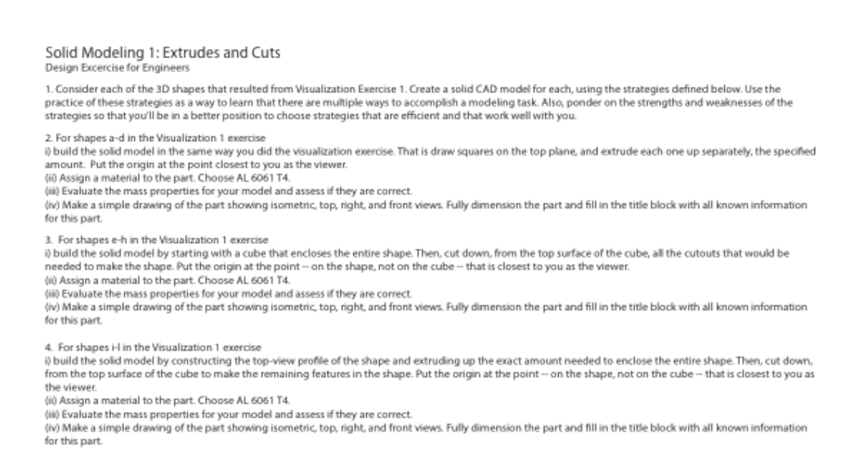If you follow along in this video, you'll make this part and this drawing. I do recommend, however, that you pay attention to the description of the exercise so that you make sure you're working on the right things.

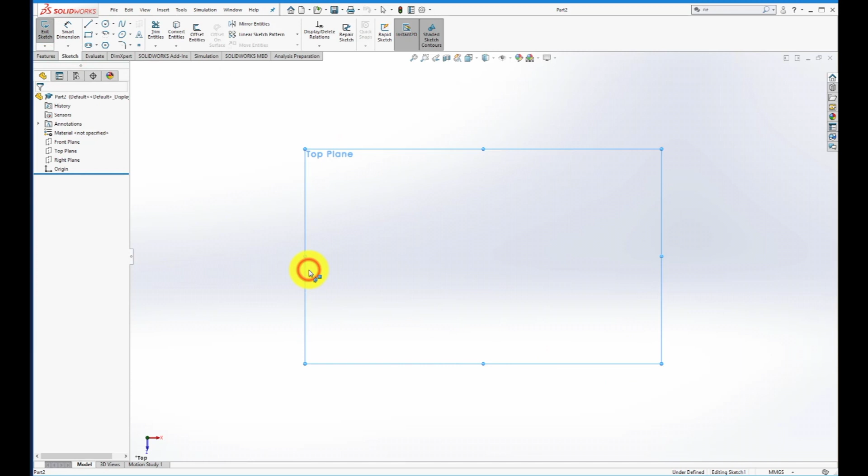Now, as we start our part, we want to make sure that we have named this well, following good naming scheme methodology. We also want to make sure we're working in units of millimeters. We want to start our sketch, choosing our top plane, making sure our origin is showing up where it's supposed to. So I've turned on the visibility planes so I know where I'm working. I got my basic rectangle tool.

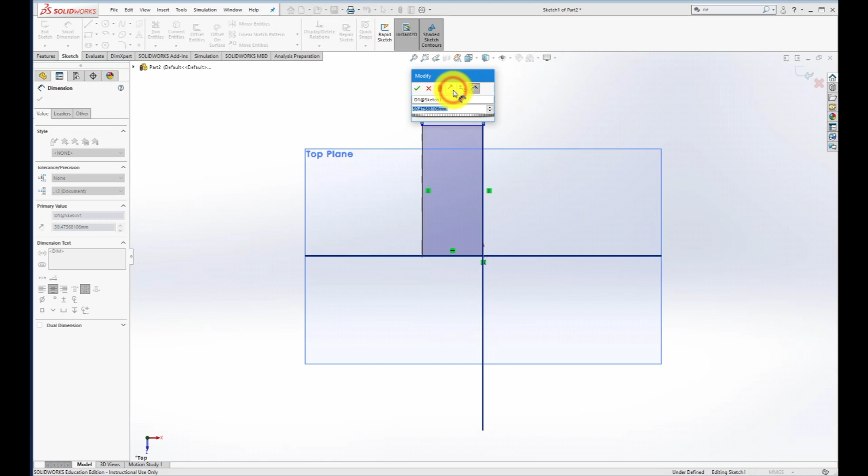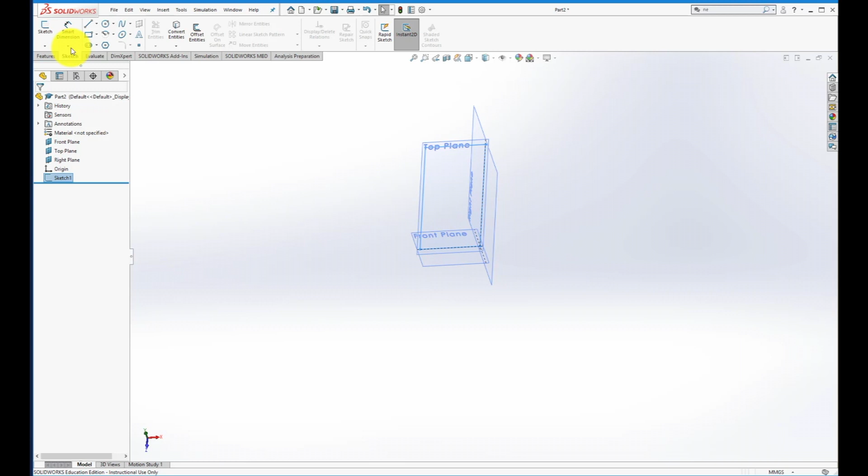Now I'm getting, on this strategy, the basic overall shape from the top-down view in terms of making an entire cube that can enclose the entire shape. So now you can see I'm creating a 4 by 2 millimeter extrusion is what I'm about to make. Of course, the strategy that I'm going for here is to make this entire cube and then cut out the parts that I don't want. This is going to give me some experience in learning how to make both extrusions and cuts.

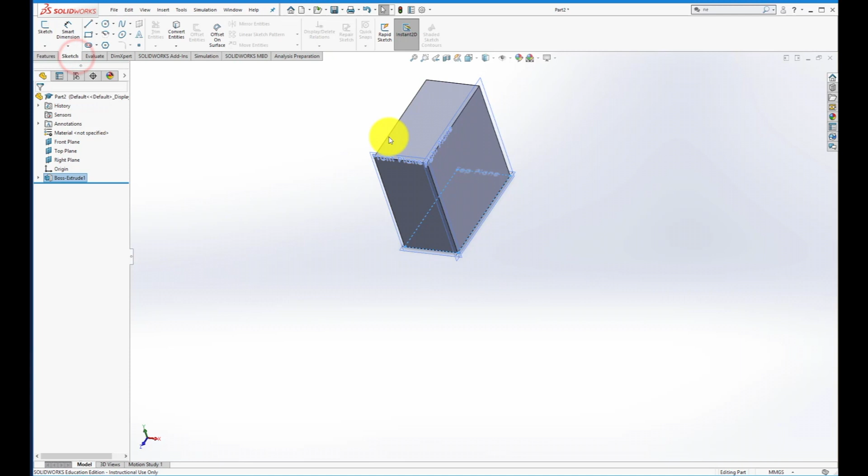So I'm referring to the drawing here, or the hand sketch from visualization exercise number 1, to make sure I'm getting all the dimensions right. And this is looking pretty good to me. So on to starting to create the cuts. I want to do the cuts from the topmost surface, which is why I chose that plane of the part. Notice I did not choose the top plane, but I chose the topmost surface, the top surface of the part itself.

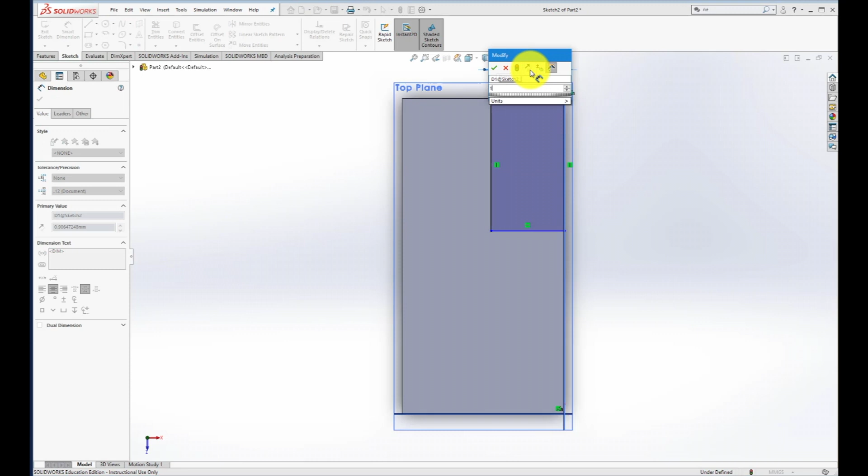Now I'm creating the shapes that I want to use to create a cut, setting these to the dimensions according to the hand sketch that I made. That's looking good, and as I rotate this around, it looks like I got it on the right surface and things are looking good. I'm going to go to this extrude cut button.

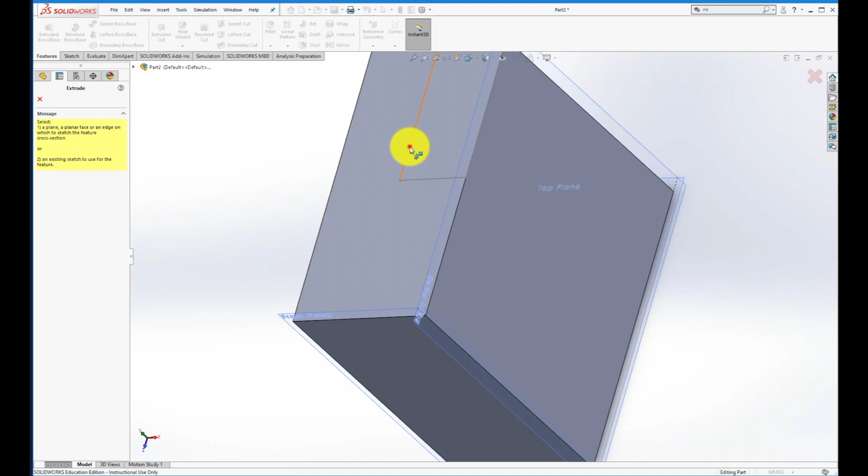Now it's asking me to choose the thing that I want to cut, and you can see that's worked out just right. It's exactly what I want. So I'm going to go ahead and choose to accept that. And as I do, you can see things are starting to work out for me here. Now I've got another cut that I need to do. Now this part's going to get just a little weird, but it's okay.

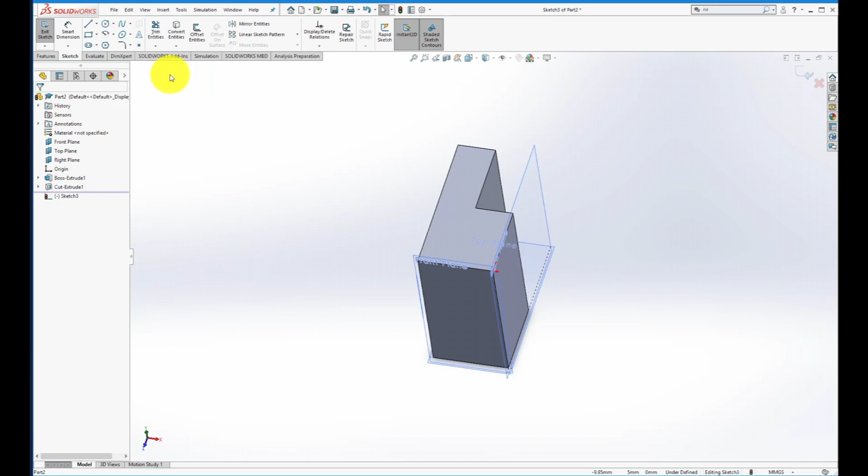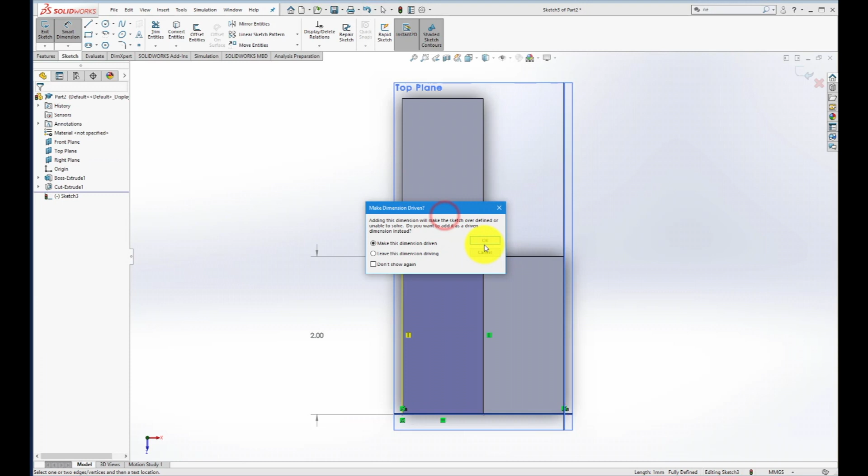It's going to get a little weird because my part itself is going to become kind of two parts because this particular shape is not connected. Now you can see I chose that bottom left-hand corner and the bottom corner of the cutout we've already made, and now it's telling me that I have some redundant measurements. And that's actually good for me to know that the computer has grabbed on to those points and made them coincident. But I needed to make sure that I told it that I wanted those dimensions to continue to be driven. That is, they are just what they are because of the other geometry in the shape.

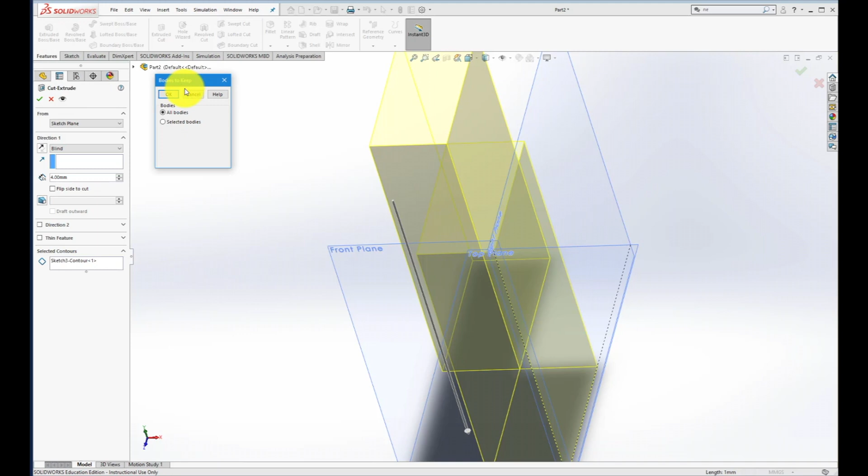Now you can see I've accepted that, and it's freaking out a little bit because I have two parts in my part. And I'm just telling it I want to keep both parts. It would be unusual to have something like this. If we had multiple parts, we'd put them together into an assembly. But we'll learn about that later.

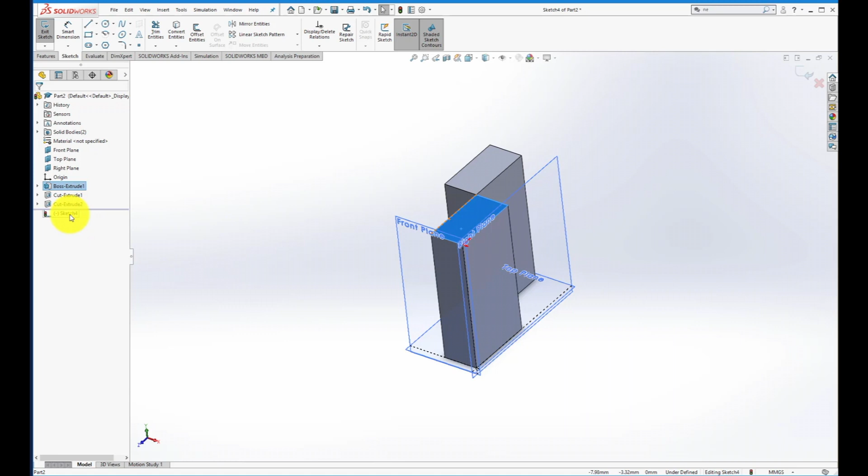All right, so now I need to just keep creating my cuts. And I know that on this surface, keeping track of where the origin is, I have two cuts that I need to make. So starting in the bottom corner, coming up to about halfway, I create the box that I need. Now I'm going to get some redundant measurements again because it knows it's going to the center point, and some redundant measurements again because it already knows the size of that.

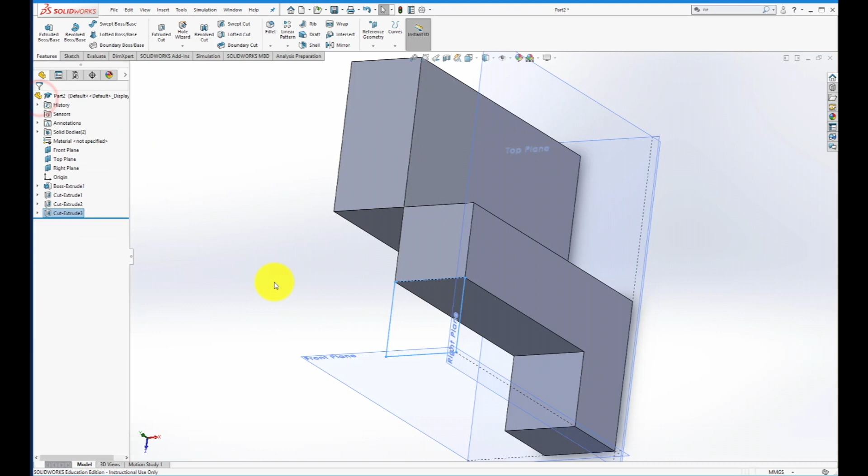I tell it I like it, and I can see the sketch plane there. I hit the extrude cut button, and it wants to go to the previous amount, which is 4 units high. I'm going to tell it I want to have 2 units high, or actually, referring to the drawing, I want to make it a depth of 3 units in the cut. So that's what I've got there.

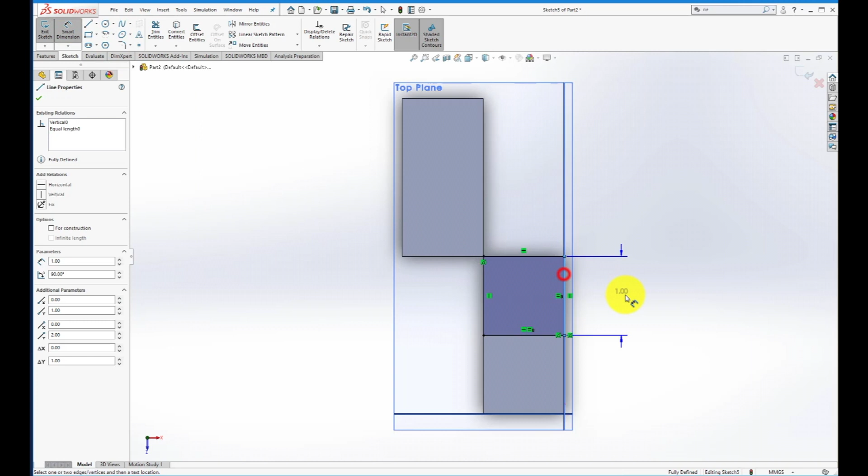That's looking pretty good. So I'm going to tell it that I like that, and I'm going to make my next set of cuts in the downward direction. I like to look normal to the plane, so I've told it that's what I want to do. Now I've gone again from corner to corner, so I should get some redundant measurements here, and yes, that's what that's telling me. Again, I get another redundant measurement. So I think we're pretty much good to go here.

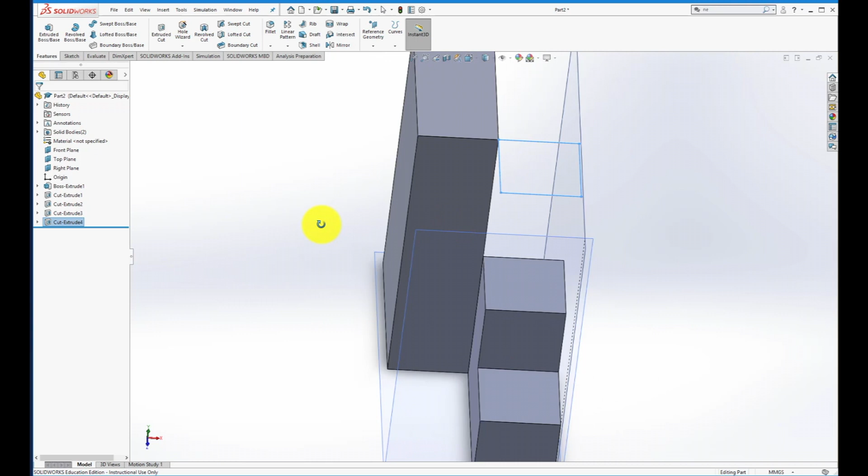I need to just tell it the amount that I want to cut downward, because it's going to go to the previous value. So there we go. I've switched it to cutting down just 2 units. And you can see I've got the first half of my part made. All right, so now it's just a matter of going on to the second half.

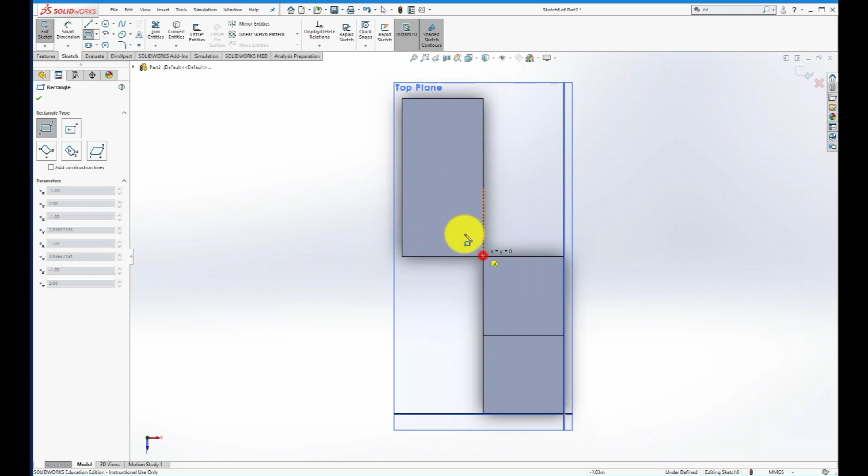I'm going to choose my top surface as the one that I want to create my sketch on. I'm going to look normal to that sketch, choose my rectangle tool. I'm going to come up here, and just for fun, I'm not going to choose the center point. Now I should have one redundant dimension here, but my next dimension is unknown to the computer, so I'm going to tell it that I want it to be 1. So there's multiple ways to do that.

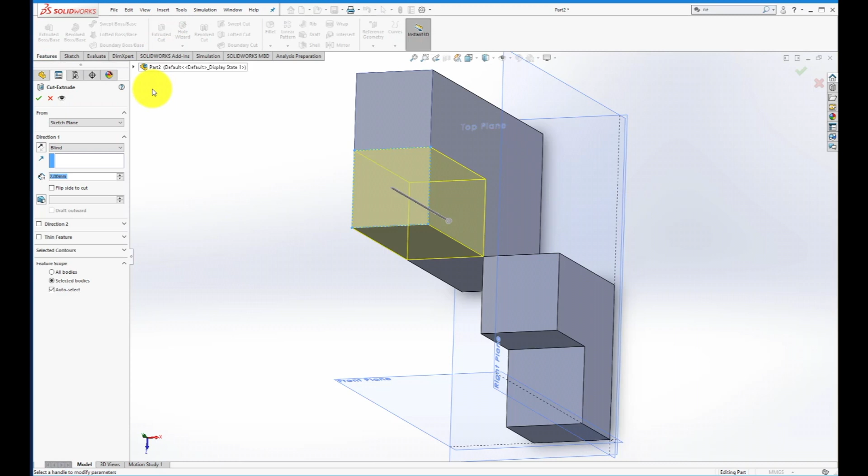And by the way, as you're working on these things, I really encourage you to think about more efficient, better ways to do this kind of modeling. I'm showing you one way, and I don't at all pretend to tell you that this is the best way to do it, but it is a way to do it, a way to get started.

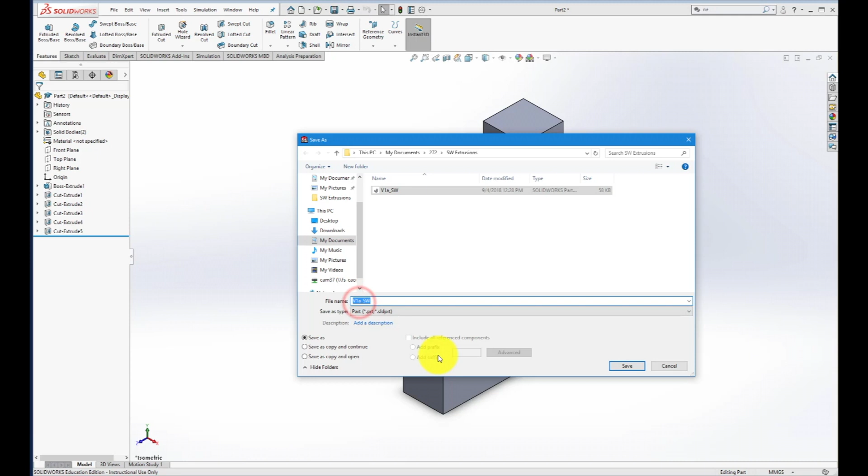Now I like to look at my views in the same way that I did my hand sketch, and so I've just set it that way. I like to turn off my planes, and now I know my part's looking pretty good. And it looks like I had forgotten to actually save this thing, so I'm saving it now as part E, since that's what we're looking at. All right, so now I'm going to make a drawing of this very part.

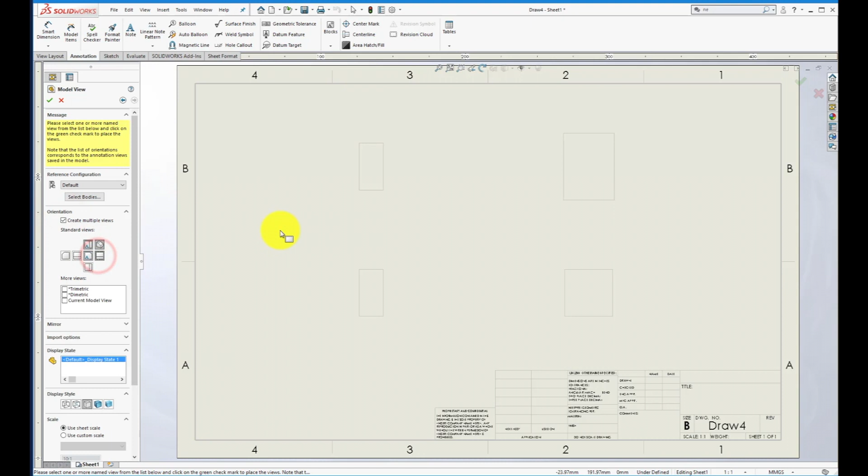I'm going to choose my B-size drawing. I'm going to click on the part that I want to make a drawing out of. I'm now going to click multiple views, and then click the 4 views that I'm interested in: the top view, front view, right view, and the isometric view. And here they are coming up. Now I'm not actually quite sure why they've come up so small, but I'm not going to really worry about that right now, because my objective is to just get my feet wet in creating the drawings.

So now I've got my smart dimension up there under the annotations tab, and I'm just starting to think about how I want to call out the way that this thing should be dimensioned. And I'm keeping track of where my origin is, trying to dimension everything off of the origin, or at least the datums that the origin goes through.

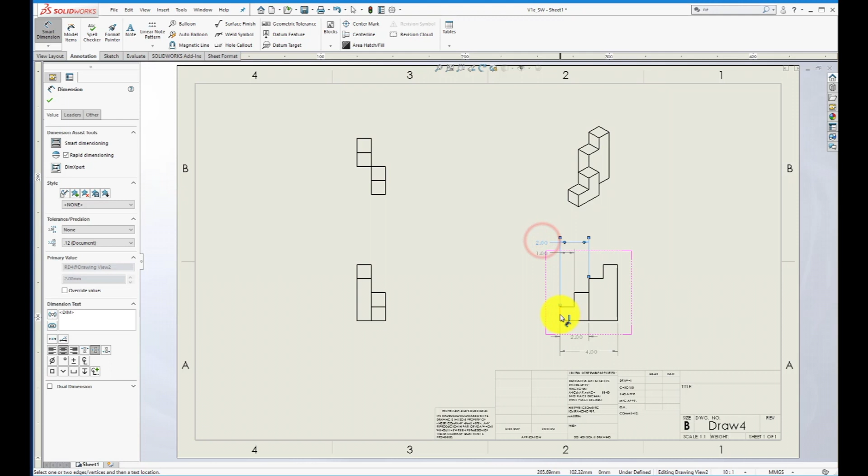And you can see I put some dimensions in there that I think I'm actually going to be removing, because I really want to just lay out these dimensions in the cleanest possible way. You can see I have that 2mm dimension on there that's redundant at this point. I definitely do not want any redundancies in my dimensions. So I'm just going to delete those.

And now my dimensions are kind of tight at the top there, so I'm just going to drag this down and just make it a little clearer. And I'm going to move my isometric view off to the side, because that's kind of where I usually like those things to go. Now I really have to spend a little bit of time pondering here on what else needs to be dimensioned on this, and what views would be the best views to put the dimensions on.

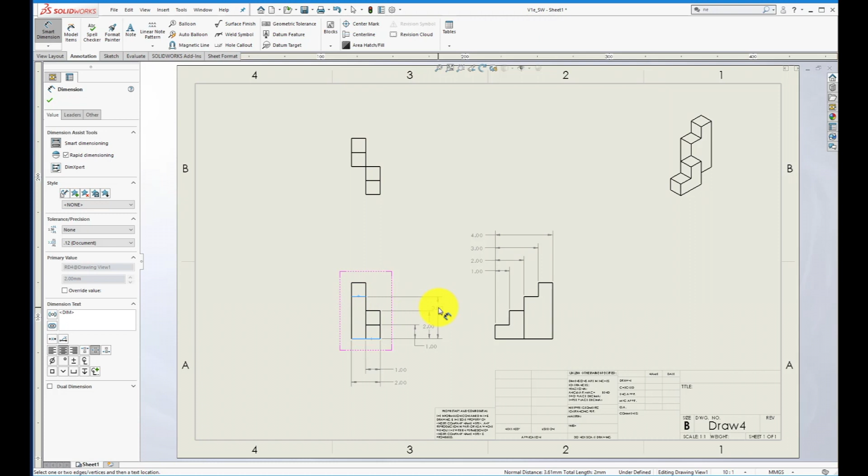So now I'm going to just do that, putting on some of these extra dimensions. They're not extra, they're necessary for fully defining the part. And I'm trying to place these in a way that they will be visually understandable and good. And there's some general practices that we will want to follow, but we'll go over those later.

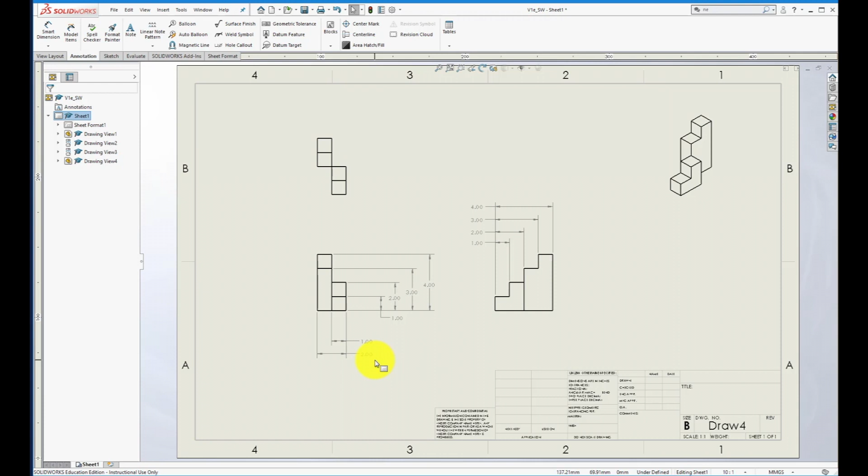I'm trying to move this view now, and I'm realizing I'm still on dimensions at that point. So now I'm back to picking the actual part and moving it. And one of the things we want to do is just get familiar with the idea of a drawing, and that's what we're trying to do here.

So I'm going in and editing the format now, and as I edit the format, I can just go in and start to add in the materials that the part is made of. I'm going to say kind of how I want the finish to be. Now in this case, I've really just kind of chosen a random material just to be able to practice specifying the material.

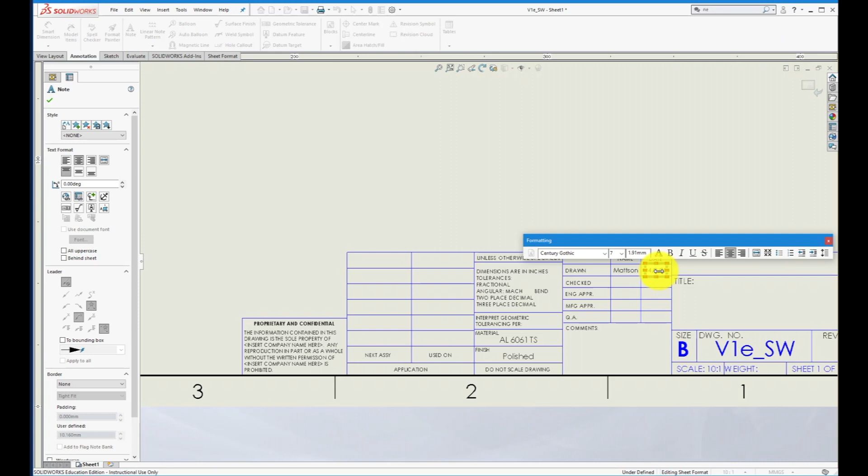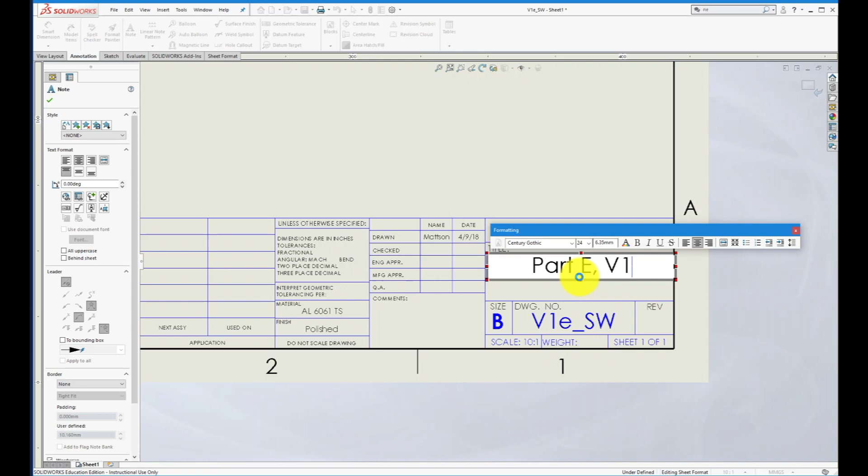Now I don't recall that we actually specified the material in the part itself, so I think we'll be going back and fixing that in just a second once I finish the title block. It's kind of important to pay attention to how you want to name your files. I like to follow this method right now, which is to put the part number, part E, and then what exercise that part originated from, which was visualization exercise number 1.

All right, so that's looking pretty good. I think I can accept this by hitting that green button over there. Now I want to add a note, because I want to be able to say things that would be important to someone who's making this or someone else who might be working on it. And because this part's unusual, it has 2 parts in one part because of its strange shape, I think I'm going to create some sort of note associated with that.

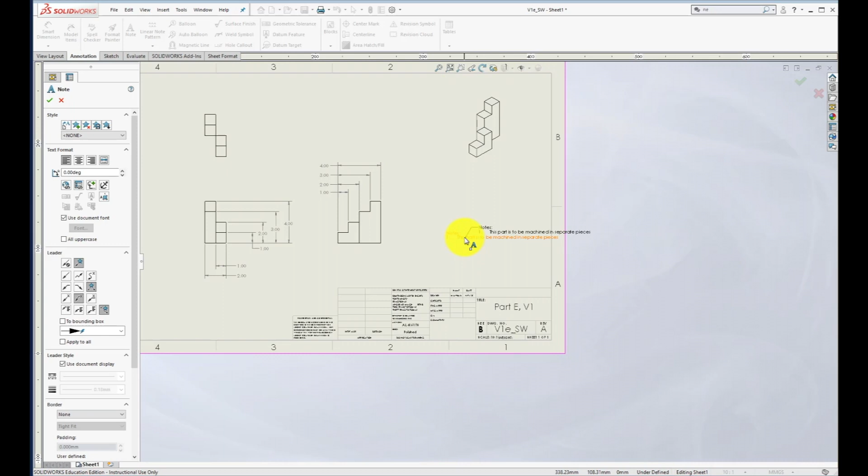Of course, if my note goes off of the format, I want to pull that back into a desirable spot on the drawing, which is what I'll need to do in just a second. All right. There we go. All right, so I think it's valuable now to go back into the part after we save this.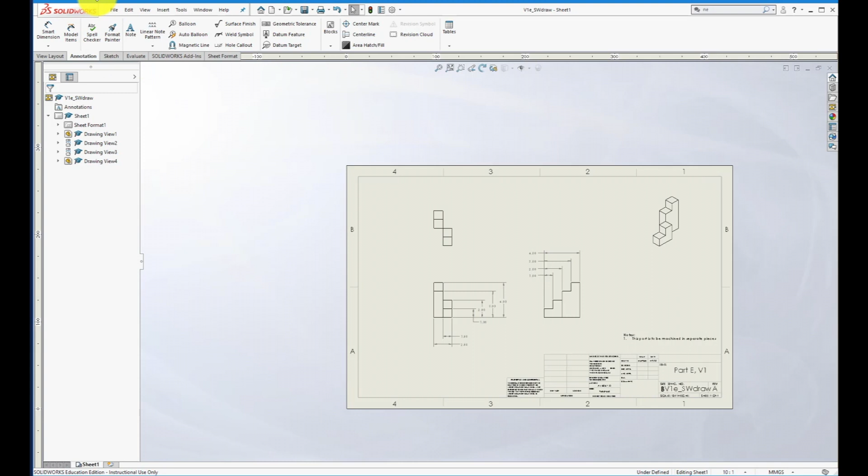And I want to see what's going on with the materials. So I'm going to right click on the materials and assign a material to this. So I'm closing the steel, opening up the aluminum, scrolling down until I find 6061 T4.

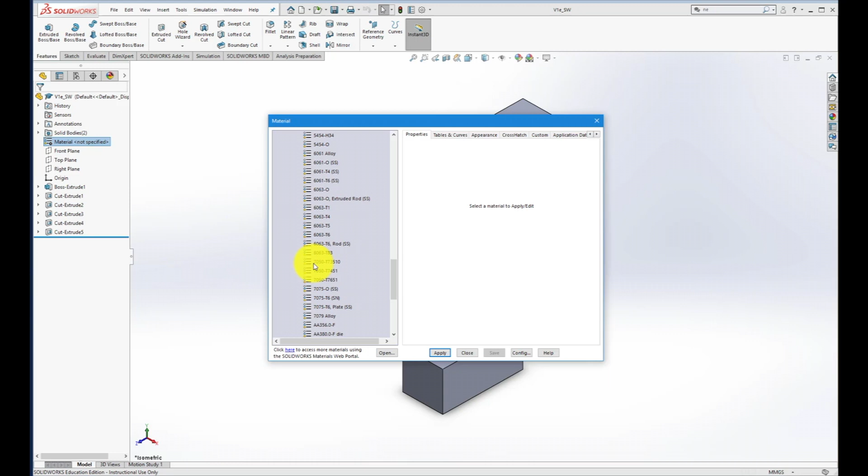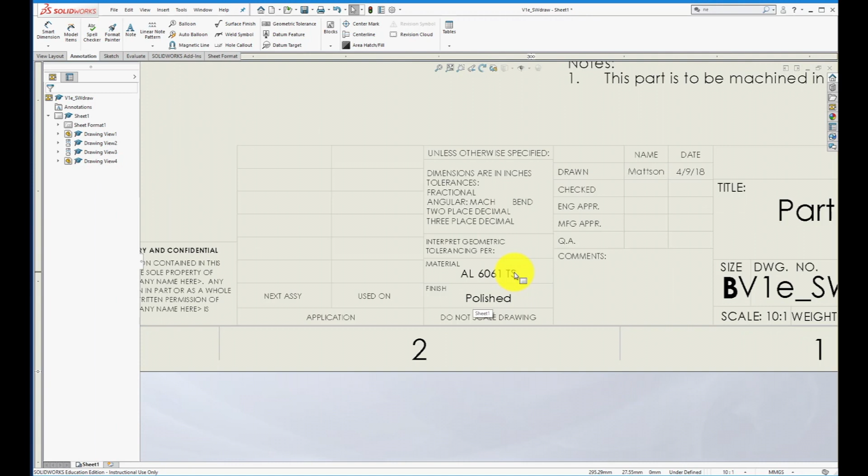And actually, as I'm doing this now, I'm realizing that I think I wrote T5 on the drawing. I'm going to have to go back and check that. So I've assigned a material. You can see over on the left-hand side, it shows material specified. And now I'm zooming in here, and it looks like I did write T5.

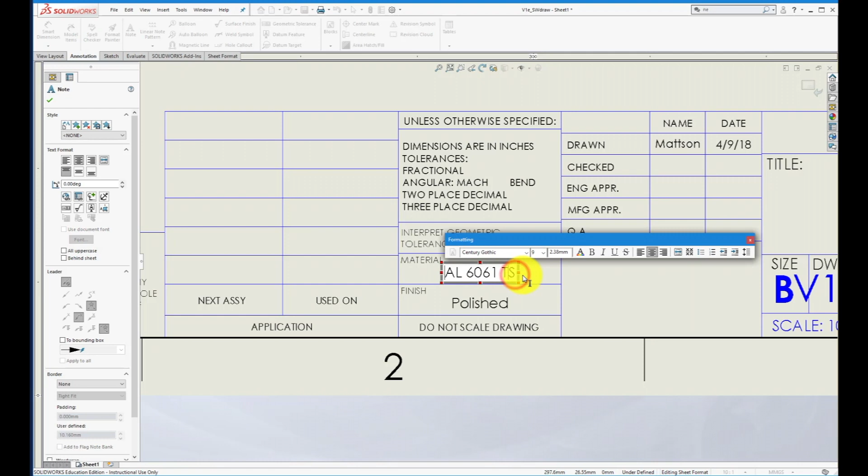So I need to just make a change. I'm going to edit the format, double-click on that, and I should be able to switch it to a 4. There we go. So that's that. Saved. I should be in pretty good shape at this point.